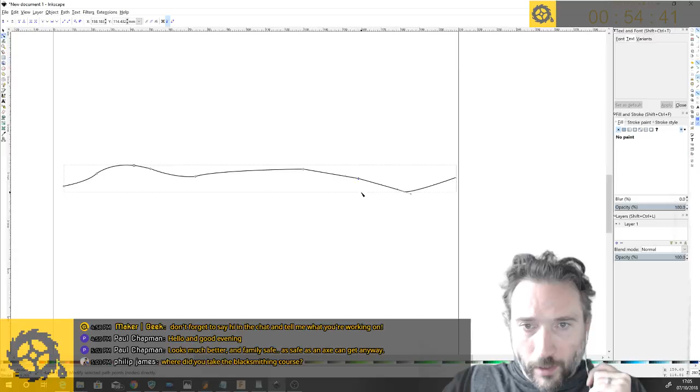Somehow I managed to end up with straight lines and curvy points. I don't really understand Fusion in that regard - not Fusion, Inkscape in that regard.

Okay, so very boring line. Let's create some text. Text. Make...

A geek. I wonder if we'll have room for 'CAD like nobody's watching'.

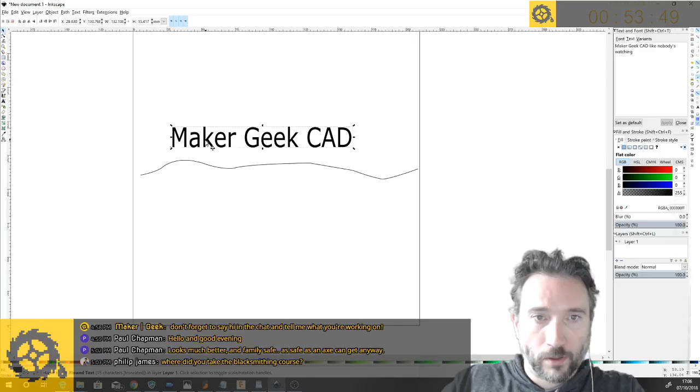Yeah, give me more size. Can I? Oh, why did that disappear off the end of my text? It's all there - if I do that... 'CAD like nobody's'. Okay, that's weird.

Nevertheless, what we're going to do is select the path and select the text, and somewhere there we are - put on path. Marvelous.

Well, I really do want to find out why it's not giving me all of my text. Have I run out of space? Maybe. If I get rid of that for a second... length of text is longer. Yeah, apparently I lose it after a certain amount.

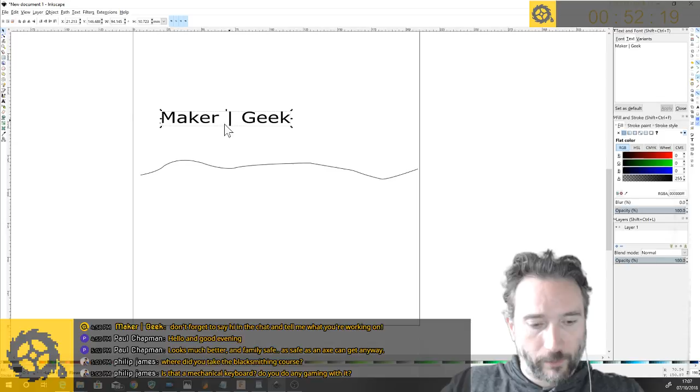That's interesting. This is where I should just ask for somebody that knows better. Okay, well, I'm not that fussed about it at the moment. Let's just do that for now, and we'll put it on the path. Oh no, I need to select them both, I think. Text on path - boom. That's a little bit funky.

That'll do. And save as SVG. Let's do that - text on curve. We'll just put it on the desktop for the moment.

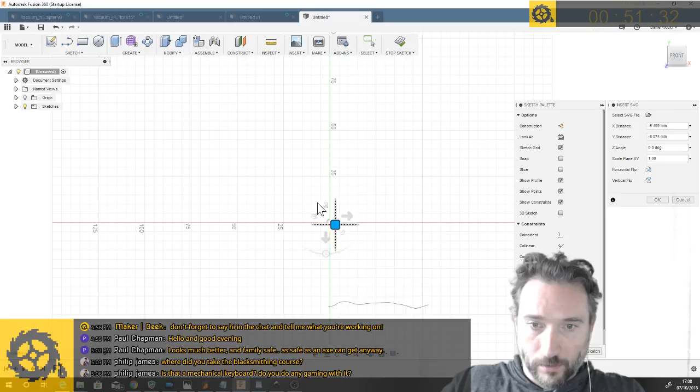So let's have a new design. Insert SVG onto here. Go find our text on curve. Oh, that's interesting - so I have the curve, but I don't have any text.

Well, it is a mechanical keyboard. You can obviously hear it in the speaker. It's not a gaming keyboard. I just really like that when I'm working from here, I can get away with having a really antisocial loud keyboard. It's just really lovely to type on. It really is, it's a joy. I've had it for a while, and compared to sort of mushy, quiet keyboards, just having that tactile click...

Is the business. Okay, why didn't I get my text on the curve when I asked for text on a curve? Did I manage to export the wrong item? Let me see about that. Replace it - possibly, maybe I was just selected on the wrong thing when I did that.

Sadness, they're just giving me curves and no text. Why? This is not the part that I thought I was going to have problems with.

That's peculiar. What if I... Oh, maybe, do I need to convert the text? I need to turn it into a path or something - object to path? I have a funny feeling that might be it, that it can't export it as a font, but needs to think of it as a set of paths.

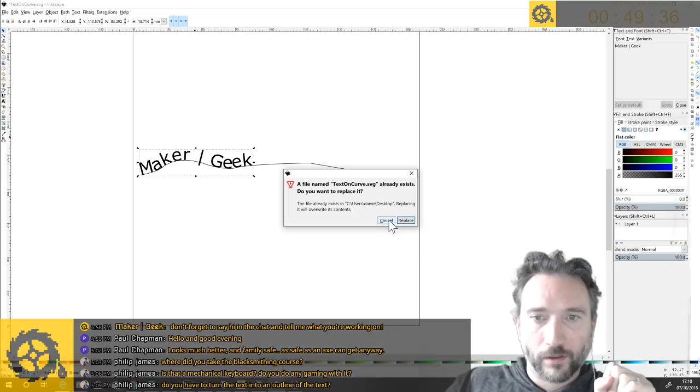Let's try that. That rings a bell actually, that you have to do something with the font. Let's try that again. Hey, there we are, that was it - you need to turn it into paths before you can have it.

Okay, so let's do that. Actually, might get rid of the liney bits, or maybe I'll just accept. Right, so now then, now where it gets a bit more interesting.

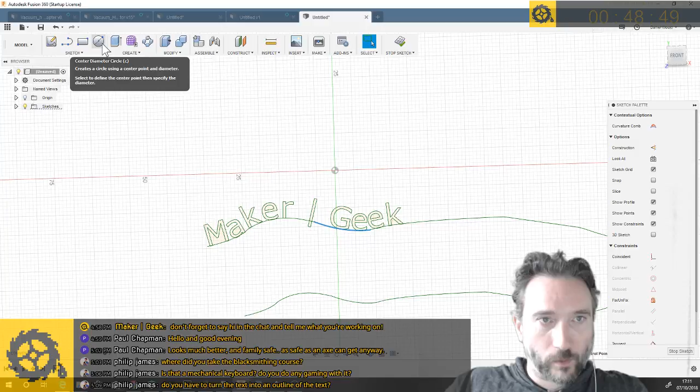I was just watching a YouTube video which explained a method for using the sheet metal environment to get yourself a curved surface. So let's make this 100. The basic idea was create yourself a circle.

Oh yeah, I kind of want those sketches to be unrelated to each other. Let me forget that, go away. I want to create a new sketch please. Stop sketch - you can be one sketch. Create a new sketch on here. Thank you - so create yourself a circle of a certain size.

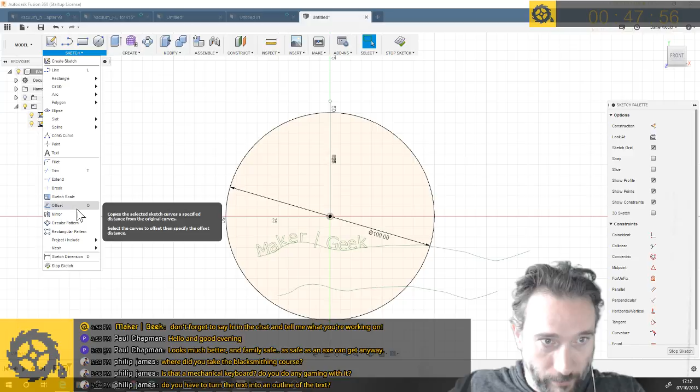Take a little notch out of it, like so, by creating two lines just close to each other. So we'll offset that line, and then turn these into - well, I guess I was going to say turn them into construction lines, but it doesn't really make any difference. I guess I've obviously killed it. Okay, well there you go. So I've ended up with, come on, you as well - construction lines. So you end up with just this sort of slightly incomplete circle.

Now, sheet metal - create a flange, and extrude this up to be, I don't know, let's say 20.

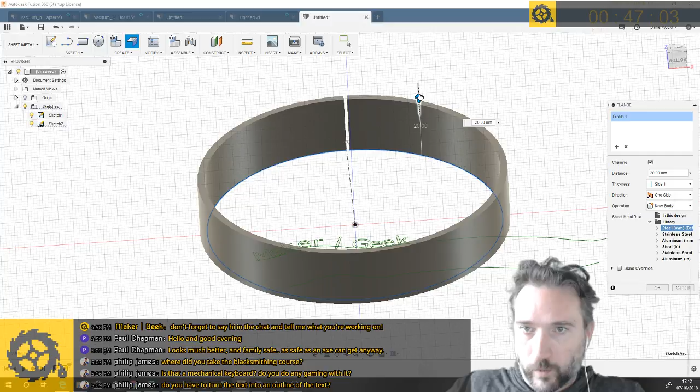So now you have this thing, and apparently to do folds you need at least some section which is flat, which is why you cut this little notch so that you can extrude out a panel, and you end up with, in theory, a little flat bit. He says not being able to select the little flat bit. Let's see if this works anyway.

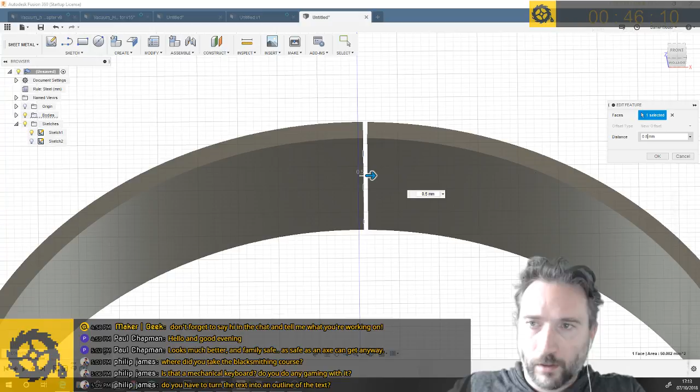Then you can say unfold. No, that didn't work. Why didn't that work? Did I not extrude it properly? Did I? Oh, I did offset faces. What is that? Maybe that's a problem. Should I have done a proper extrude rather than offset face. This is why it's important to go through these things yourself, to be like, what is going on?

Okay, let me go get rid of that. Forget that. I often get into this problem between offset faces and extrude. I actually want it to extrude, whereas I think offset faces was doing too good of a job. Okay, and I don't want to cut, I want to join. Right, yes, there we are.

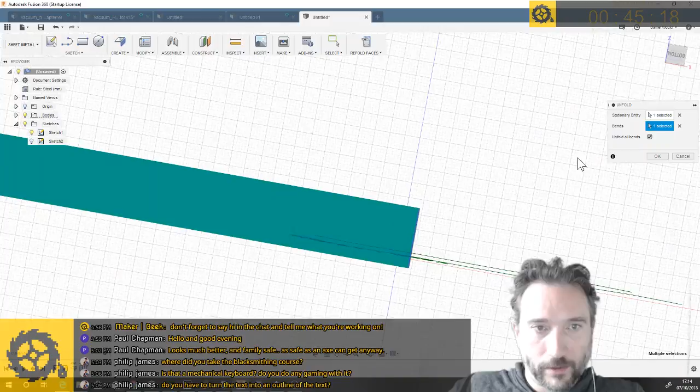So now we have a little flat notch on the end. That's what we're looking for. So now that we can do that, you can say, take this bad boy, select his flat face, and unfold everything. So now you have what was a circle, and you now have a flat section.

Now what I want to do is take this sketch, and I want to redefine his sketch plane. Oh, of course you would like hide everything from me. Okay, I don't want to. Can I not? You know what? I'm just going to import the damn thing again.

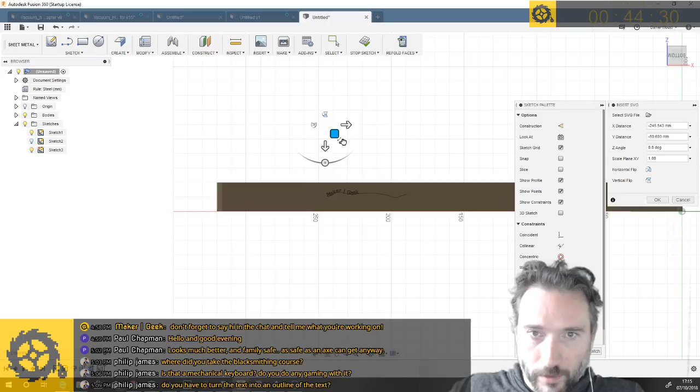I'm sure there is a nice way that I can import onto this surface. And of course you've hidden everything behind there. Let's scale him up. Scale him up a bit more.

That's the other thing I remember about Inkscape, is that you import things and they end up in the relative position that you had for the A4, and so they end up in the middle of somewhere. Anyway, okay, so stick him there.

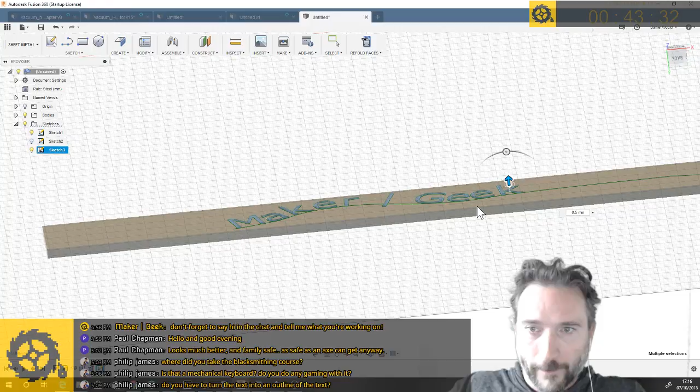Now let's extrude all of our letters and shapes and join them, not cut them. So there we are, a nice raised text on a thing, and then refold faces. And what we should have, oh, it's on the inside. But what we do have is perfect text on a curved surface.

That is pretty cool. Now, that was the example that I found on YouTube, and I really should have made a note of the guy that I watched. If you search for like text on a curved surface, I'm sure you'll find the same video I did.

Now, I'm curious to know how far I can go with that. Like, can I make like a really... I mean, I've never used the sheet metal environment. I assume that you can create folds of all types, flatten them out, put text across them, and then refold them. That's quite an interesting idea.

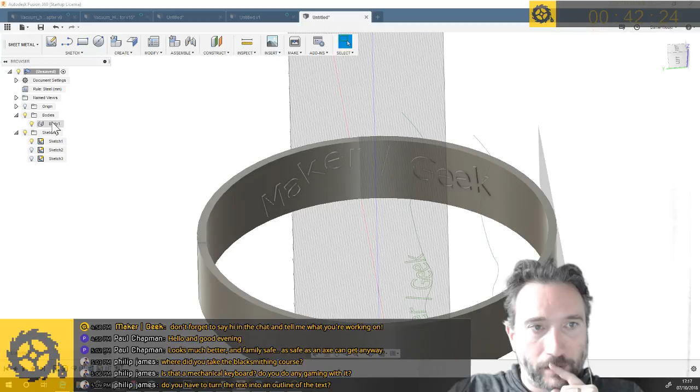So this is now a weird kind of a body. What does that mean? It's a manifold. So if I go back to the model environment, what is it? So it thinks of this as a type of thing. I'm just curious to know whether that can be exported as an STL like that? Yes, it can. So I think that's pretty cool.

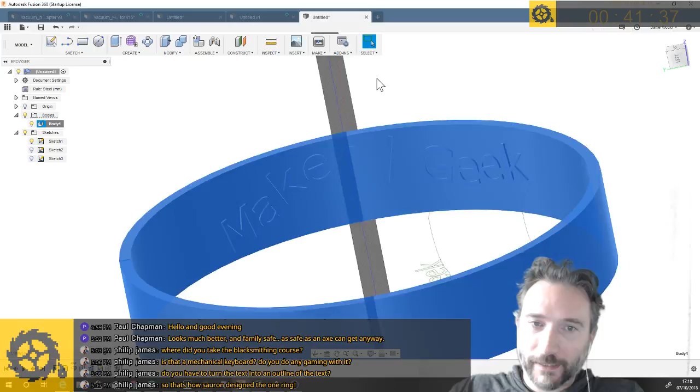I mean, you have to figure out which side to be on to get your path, but you can both have it kind of on an interesting path and also around a surface. Yep, Sauron on Fusion 360, that's exactly how he did it. Put the text on the inside.

I think I want to have a quick go with whether or not I can make a more interesting manifold. So let's get rid of that for a second. Can I make a manifold off of this crazy line that I made? A flange. Why did I say manifold? I think I've got the idea of manifold on my brain.

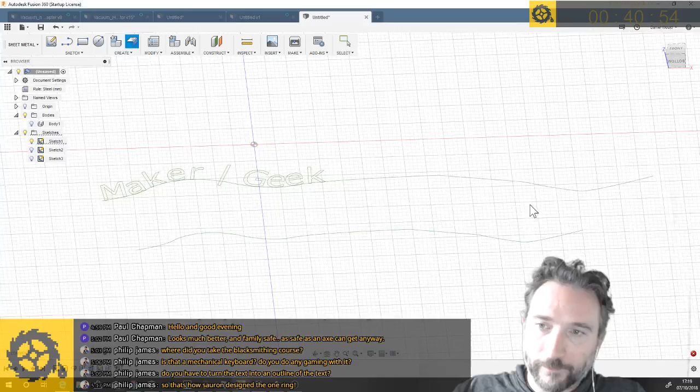Okay, well that didn't work. Error, could not create a valid result. Try adjusting the values, changing inputs. Okay, that's no good. What if I draw?

Yeah, so that's lines. I'm just kind of trying to think how I could get a more interesting shape than just this. Maybe that's time for another day. Time is ticking, I don't want to spend it all on this.

Text on cylinder. Okay, but that's kind of cool. If you get the hang of it you could probably do some cool stuff. I'm wondering if you could do spirals. Yeah, I think I couldn't extrude the line because there's nothing to it.

Although the doing of the circle was off of a single line that had no thickness to it, it gained the thickness automatically as part of making it a flange.

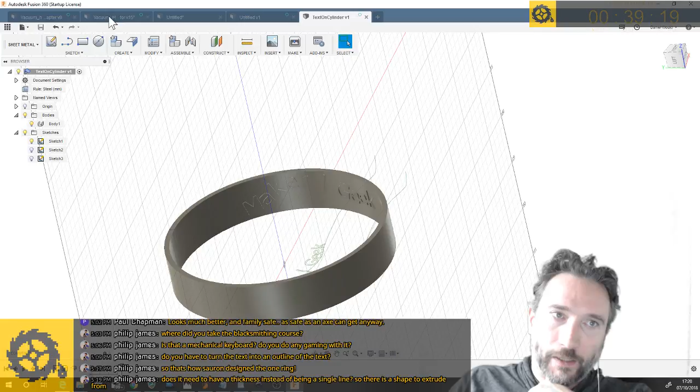Anyway, quick return to this. So I was just quickly gonna try again to get this little reducer mirrored around the place. I've come back to the point in the timeline before I joined it. I did earlier, what did I do? Oh, I have to go back to the end of the timeline.

But I have created a little bit more clearance on the inside and created a little seated part for the bottom of the interior, which I think will help with the print.

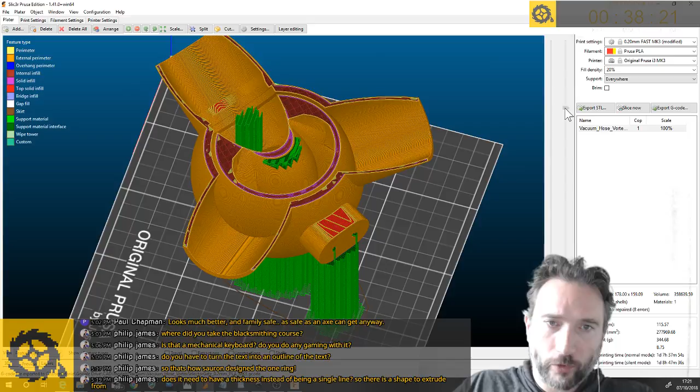And in fact, if I look at this, so this was me slicing earlier. So you can kind of come down through this. See, it does put some supports on the interior spaces, but that's kind of okay.

But what I realized when I did this earlier was that I hadn't quite separated the two components at the bottom. They were going to get welded together, which is not very easy to see in this view. But in this view, you can see here that before it gets split out, I'd kind of messed that up. So,

And I remembered at that point that I also hadn't made the reducer collar all the way around. So quickly then, let's pattern that bad boy. Circular pattern, that's the object. This is the axis, blue axis. Okie dokie, I think that should all be okay.

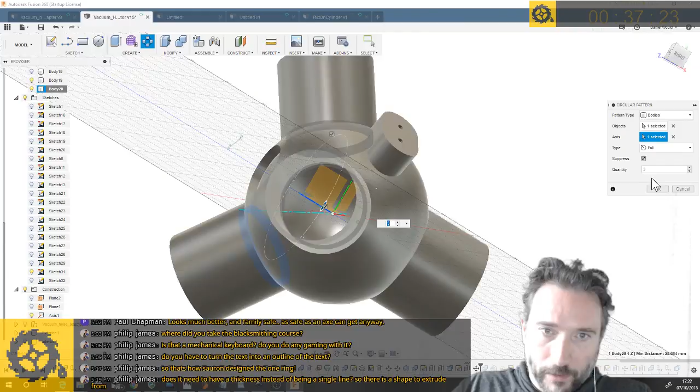Marvelous. So if I return to the end, what I should find is, although I don't have the chamfer on the other two, I do at least have that ready to go, so we can put that chamfer in and join them as well. In fact, let's combine them right now.

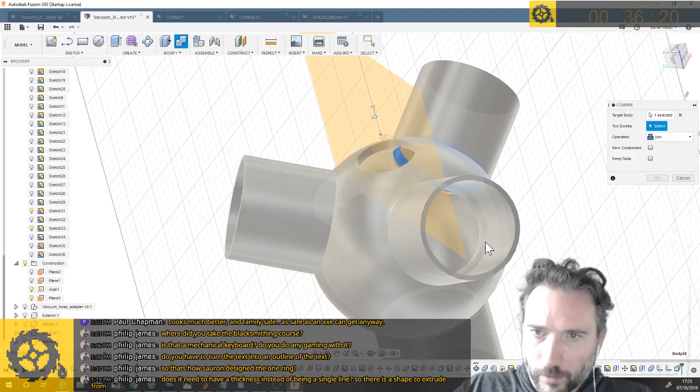You and come on. Turn off the interior piece. I want to select. Did I just go to the wrong one? No. Fine, I'll combine them one at a time. Whatever. And we'll combine this guy, and then we're almost done.

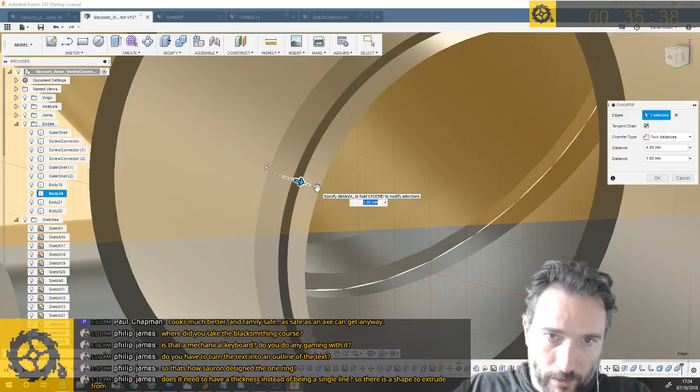It's always tempting with a really long print to just sort of rush to the point that you can hit go on the printer, but I try to be good and remind myself that it's better to have dotted the I's and crossed the T's than to set off a print that then wastes a whole load of time.

Okay, and blend it back. I can't remember how well I did it on each of the sides, but that's whatever. Construction planes are in my way. Cute, no, not that. There we are.

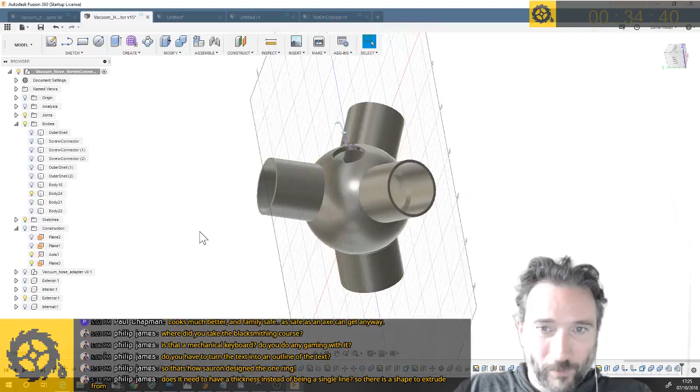So let's get in here. Right, that might actually be finished, which is a miracle after the amount of time I've spent faffing with it.

So everything's got a little bit of a reducer to help the airflow. We've got our bracket. There's now more like a mill clearance on the interior. This surface here is the bottom of the internal piece, which hopefully gives us something to give a support against, which I can also rip out easily enough.

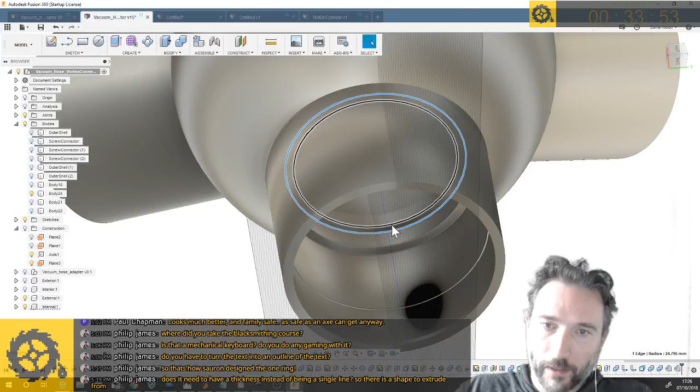And I was thinking that once printed, I might even be able to stick a rubber O-ring in this gap between here and here, which would give it something to sit on, which would hold it in alignment and would also give it that little air brake. Oh, well, you know what I mean - stop air from going around the outsides.

I think that that's done, I think it's done. It's good. The only thing I need to figure out is, when I come here - when I combined what was a component body with another body, it started to make it not part of my component anymore. Come on. Oh, fine, just create a component for it.

So I realized at some point that you can only export multiple STL files - I think this is true.

Or multiple disconnected bodies in a single STL file if they're components. You can't do it from the normal list, which is kind of odd, but whatever. The first time I had that problem, I ended up actually connecting two things together with a tiny little cylinder, just so that I could hold them in their relative positions.

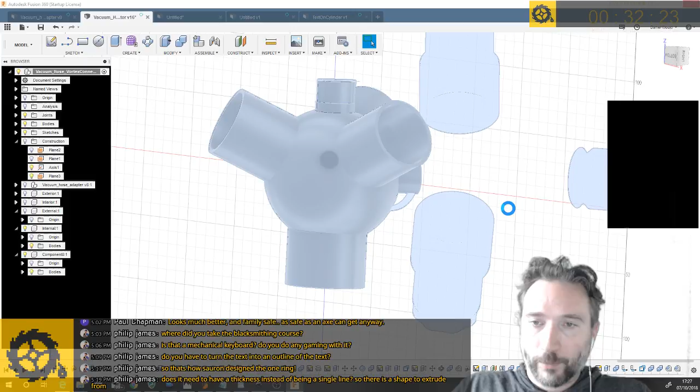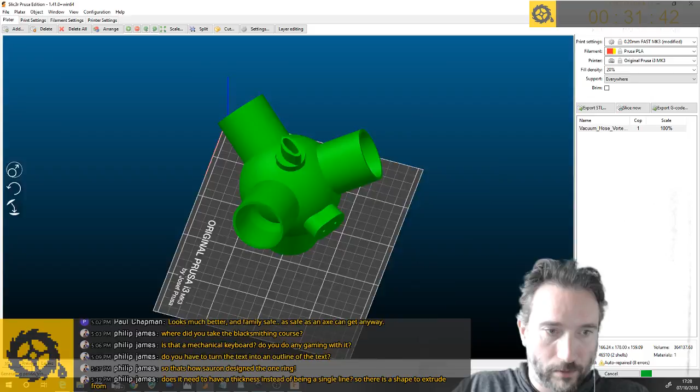But then I found out you could do it through components. So let's just export this, and that will be that for the moment. Where are we? Vacuum hose vortex connector. That's the business. So now if I come here, we'll just quickly drop that object out of the slicer, reload it, keep all the same settings, and go slice. Hopefully that will be that when it loads. So yeah, that's going all right.

I still need to think about this whole kitchen knife design. Such thoughts.

It's taking its time, it's a bit of a complicated model. It's definitely going to take more than 24 hours to print, so I also need to think about when to print it, because as much as I don't mind the printer running overnight when I'm here, I'm not as comfortable leaving it running when I go out to work. As safe as they are, I feel like that's just asking for trouble.

Hurrah. Okay, so what we need to see is whether or not we have successfully left these components separate at the right point, and that is really hard to see. Let's go to layers. That does not look right. Although, or is that just... is this support material? It might be that it just ends up on the same support material.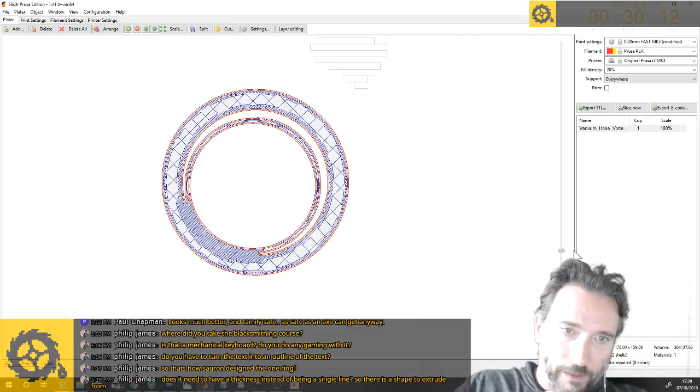Tricky. That definitely looks like it ends up connected. I do not want it to end up connected, that would be really irritating. Okay, I'm not going to continue worrying about that for now. I've spent way too much time fiddling around with this idea. I'll fix it at some point this week. We'll get it printed next week. I'm going to try and have the physical thing to show people. That would be ideal.

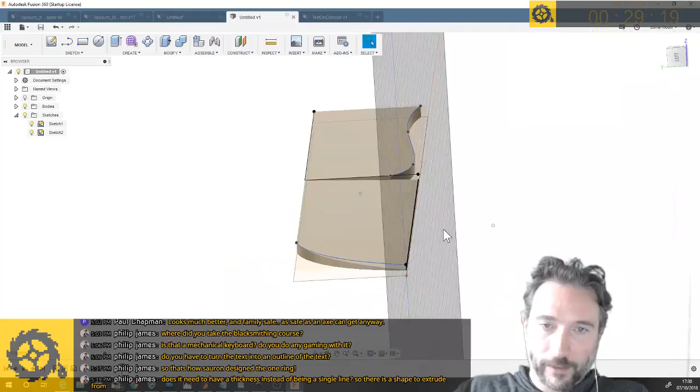Right, so back to knife ideas. Specifically, I think what I was thinking about was how I want to create a filing jig to go with this. I was thinking about this earlier, like I've got, I didn't bring it up, so I have these hand files. I had this idea of creating a set of clips that would clip the file in, that would run on little runners. This doesn't make any sense, but basically try to hold it in exactly the right plane.

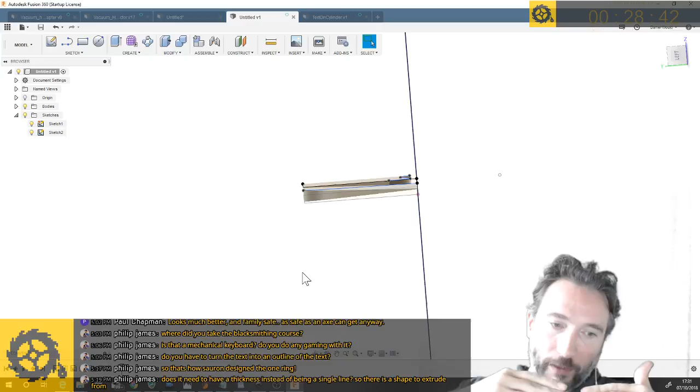So you have a 3D printed base that you put the metal of your knife into, that would initially just hold it so that the right amount of waste material is held above the plastic line, and then a jig such that you can only move the file in that plane and within the confines of the blade. That was a really terrible description. Maybe it will come clear if I get that far.

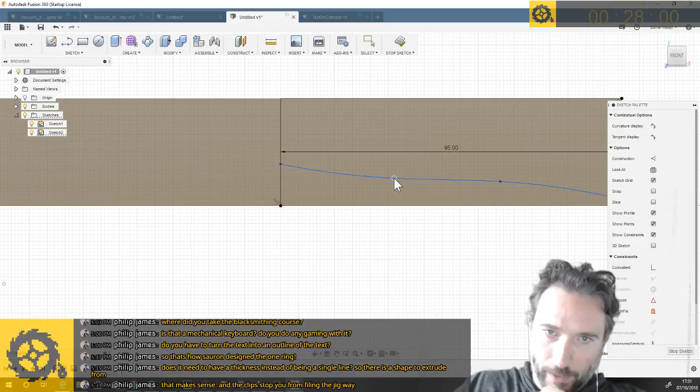But I feel like that's where the potential comes from, is this idea of I'm just going to adjust this whole kind of rubbish handle idea. Yeah, just the potential to build essentially a jig which is exactly for the thing you're making, if that makes sense.

What is a good handle shape? Maybe that. I feel like with a chopping knife you definitely need that clearance. What is that clearance? Come on, 13 mil. How big is my finger?

Yes, Philip, exactly, the jig will stop me filing the jig away and will hold it within the right confines. So let's see, if I'm chopping, got a grip, gonna measure my finger. It's quite wide, 19 mil if I'm clenched around something.

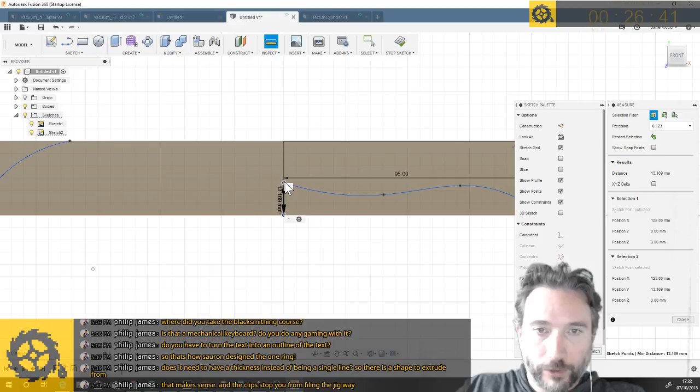But I don't want to take too much meat away from this, so hang on, this whole thing is 30 wide. So I guess if I can afford to make this, stop measuring, I can afford to make this like half, to give myself a little bit of finger room.

Can I insert a point? Insert a spline fit point. That's what I want to do. And yeah.

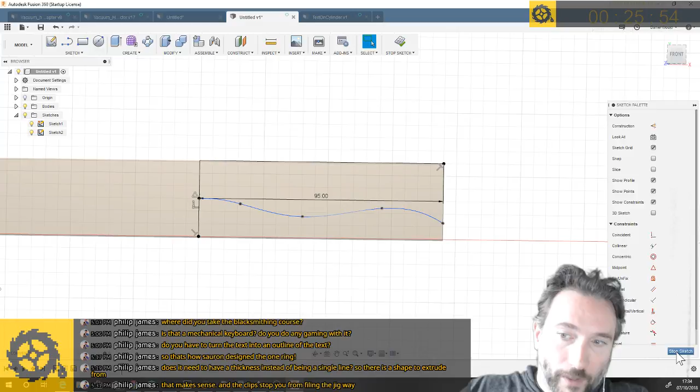Okay, let's assume that that's better. Up that, come on. Oh, did I disconnect the point somehow? Why can't I connect? That's weird. Somewhere I've managed to lose the notion that that is actually, excuse me, a joined sketch.

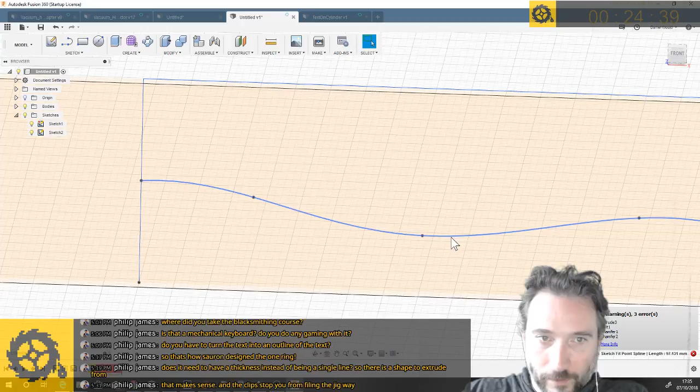I love how parametric this whole thing is, and the fact that you can come back and modify stuff. But it has to be said that I do seem to spend quite a lot of time when I go back and edit things, break everything, and then spend ages trying to figure out what I broke. Why is it not working? Why would that curve no longer do the thing it's supposed to do? It's killing me, it's killing me.

So sometimes when that happens, you find out if you zoom in that the points aren't really on the lines, but they are. Did I break it when I added a new point? But that shouldn't have done anything.

Another day in Dan is flabbergasted by why Fusion does slightly peculiar things.

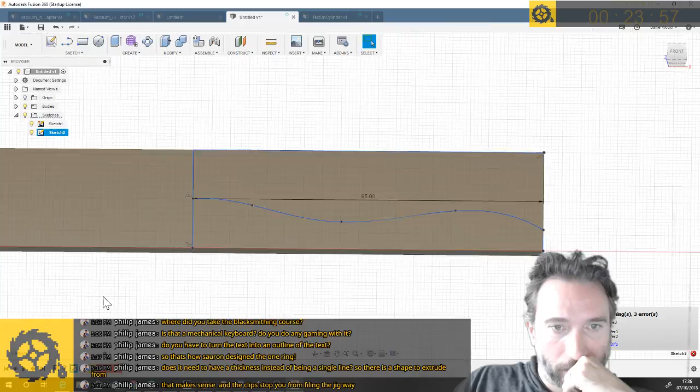Did I manage to connect it to the wrong thing? Let me delete some of these constraints. Go away, constraints, I don't like you. Don't understand what is going on. I can't do anything now. Fusion is not happy with me.

So that's definitely... Can I not get rid of that? I think I caused myself problems when I first moved that point and it snapped to the end of this constraint line, because I don't think that's a real thing. Was it a constraint line? It wasn't a constraint line. It's just a distance marker.

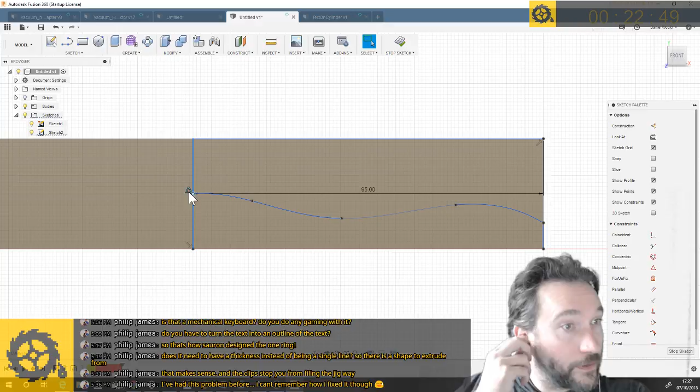Yeah, I feel like I've had this problem a number of times where I spend a while being like, what, is it on the wrong sketch plane? Is it connected to the wrong thing? I can't see the fact that I can't modify this point anymore makes me think that I've caused grief beyond grief. So I'm just going to Control Z my way back to the point just before I did that. See, at this point, it knows that this is an enclosed shape.

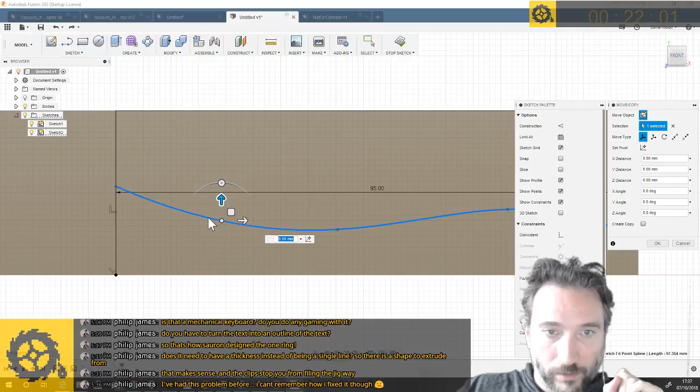So that's my theory, is that somehow I managed to... So if I put it up there, and let's... what did I want to do? I wanted to insert a... like... I can't even remember how I did that.

Oh, right, yeah, let's just say okay to the move copy. That's good, we've still got shapes. That's excellent. Insert a spline fit point on there. Okay. Right, there we are, so just going to curve that around like that.

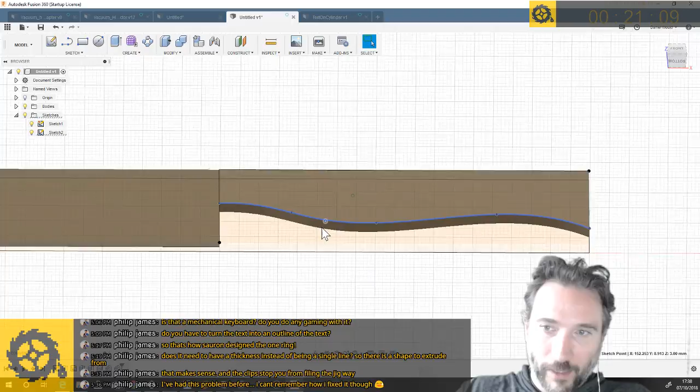That is so weird. Okay, now we're happy. So why on earth would it let me snap it to a constraint line if that then renders it somehow not connected to the sketch plane? Fusion, you've got some splaining to do.

So something else I did do yesterday after playing with this a little bit was I went and looked at my kitchen knives and realized that they don't typically taper all the way back. They have like a little hilt line, I guess, like a little wedge line that's not down to the blade. So I think I want to put that in, and I should probably put it in before I do those two things.

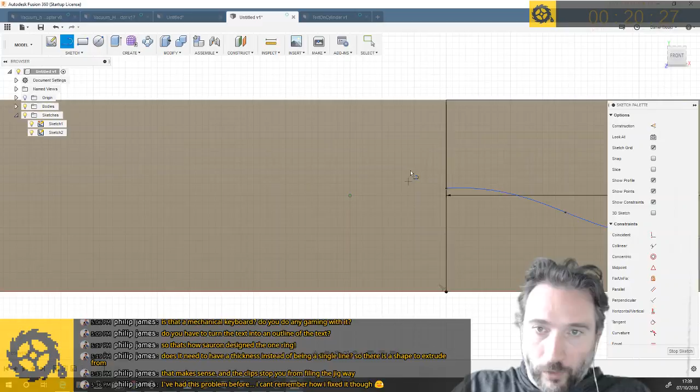So let's sketch onto here. I'm going to make it like that. And how did I do? Oh, because yeah, so I split this whole body into two separate things. So maybe I'll do the same with this. Split that body. And then we'll roll forwards.

Except, oh, yeah, because I just want that edge, thank you. And, oh, oh, that's interesting. Ah, right, yeah, because I need to fix this up, yes, sorry. It just takes a little bit of time sometimes for the brain to catch up with what's going on.

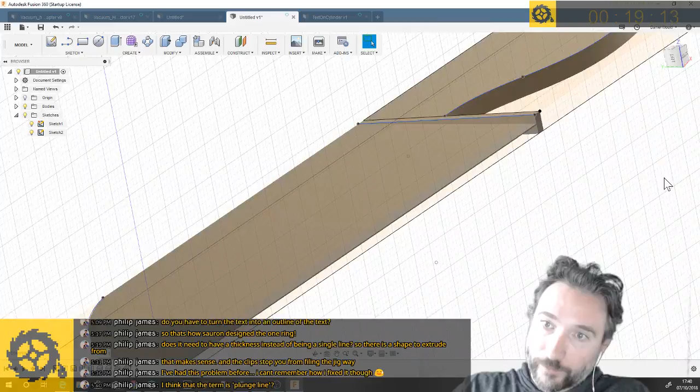There we are. So then we have this, which would be probably rounded, I guess. Chamfered. Come on. I just want to chamfer this fella here and this fella here. I'll fillet it rather than chamfer it. Like that. So the plunge line, is that what it's called? But yeah, I guess it prevents your finger running into the super narrow edge.

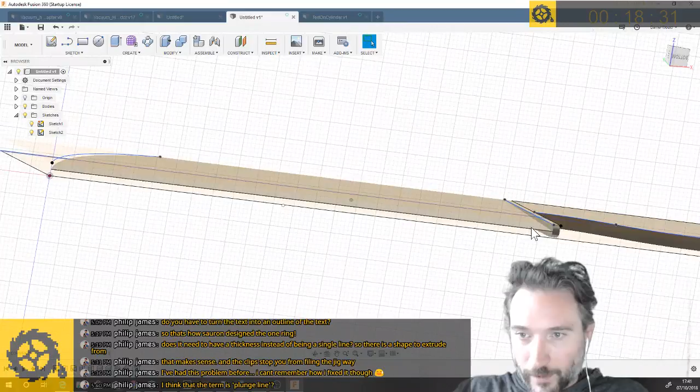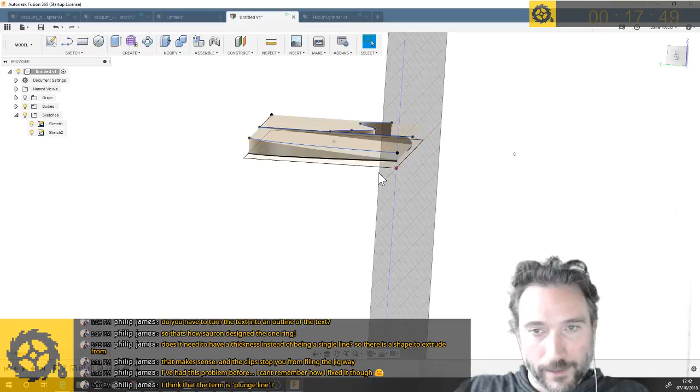So still not completely stoked about this curved line. Now again, my actual knives don't have a flat blade line. There's probably a reason for that. Probably. What I'm worrying about though is that mentally I think this makes sense to me as a shape to file and get a consistent edge on. But if I bring up the point, like if this is a curved line, then does that presumably make it much more complicated to get that super consistent flat bevel.

For the moment, I'm going to try the thing I was thinking about doing yesterday, which is defining a plane at a tangent to that face to create some cylinders that would scallop out little shallow dishes from that, which I think is what I want to do.

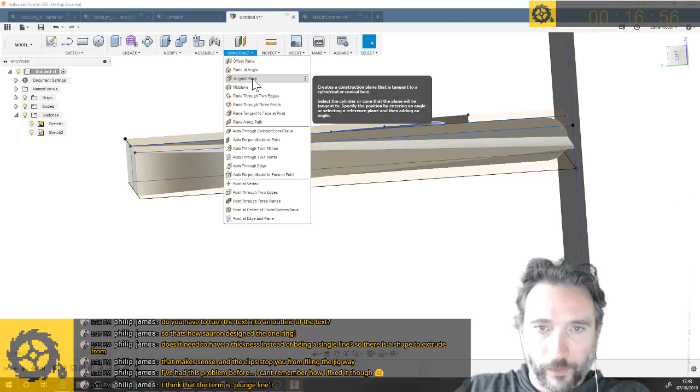Is it a tangent plane, or is it just a plane at an angle? Can I do plane at an angle and select that face? That's super annoying. Sometimes my brain obviously doesn't work right, because I think the most obvious thing I'd want is to give a reference plane which is a face on my thing, and just define a plane at an angle to that. But that's not what it does.

Plane along a path, plane at offset, plane... no.

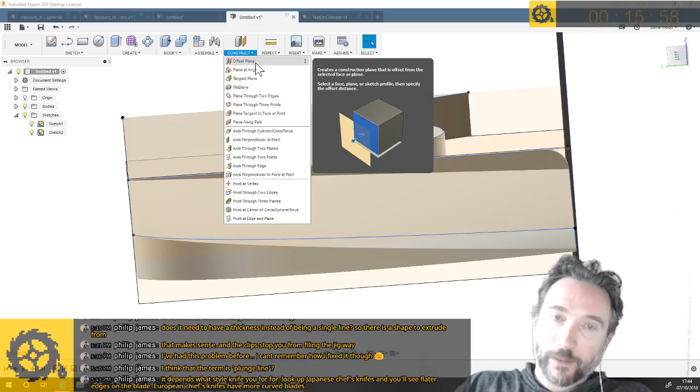Japanese chef's knives have flatter edges on the blade, Europeans have more curved blades. Interesting, I did not realize that was a regional difference. I'm sure I've seen knives that essentially have a straight edge, whatever you'd call that. I'm sort of toying between what I think I can make well and what will look good.

Plane through 3 points, plane through 2 edges. Point through... I don't want that. Oh, I want... could I do that? No. Plane through 2 edges, so I can select that edge, and that gives me the plane. Okay, that's a start. So that's the plane that the knife blade geometry is on.

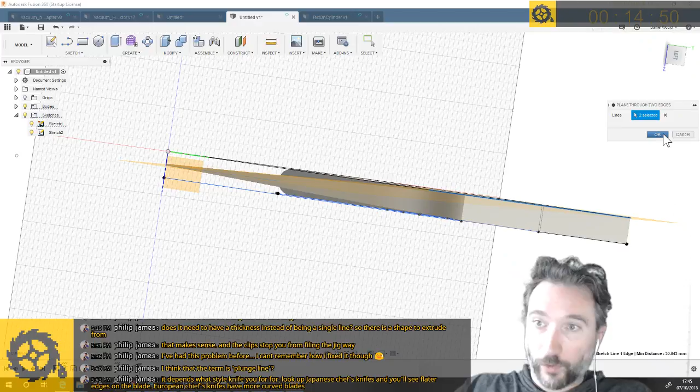Okay, now plane at an angle. Can I do plane at an angle? No, can't do plane at an angle to another plane. Why? Can I not just say, give me the plane that is 90 degrees to that plane? That's not helpful either.

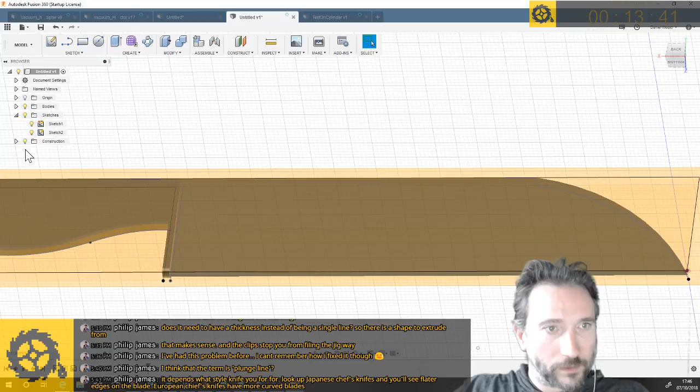So, can I do what I want with this plane in this orientation? Probably I can. I just need to think a little bit about it.

Let's sketch a slot on the new plane. So let's do that, and say 5. Oh, that's a good point. I could probably do that. It seems out of the way though, doesn't it, Philip?

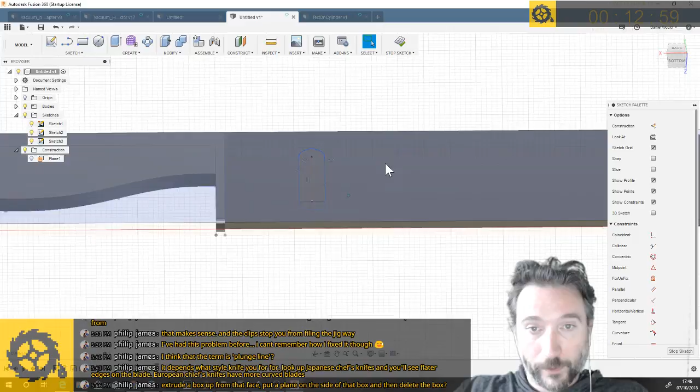Like, I mean, I think you're probably right. That would do it. It just seems odd to me that there wouldn't be a better way to do it than to have to create an object as an intermediary. Okay, well, I have that geometry.

And I kind of... oh, well, I wonder if I can do this. If I revolve this profile... no. Oh, can I...

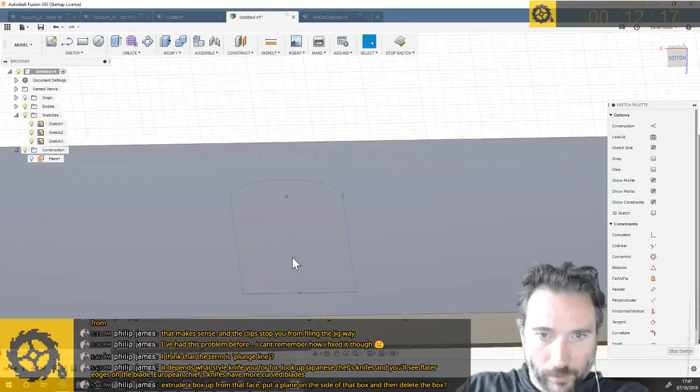Where did the bottom of my... see how I've got this and this, but I don't apparently have the bottom one. Oh, there it is, maybe it just took a while to render. So I was thinking, if I could revolve that around its own center axis, that would give me...

But it does not want to let me do that. I don't really understand why it wouldn't let me select it. Can I extrude it?

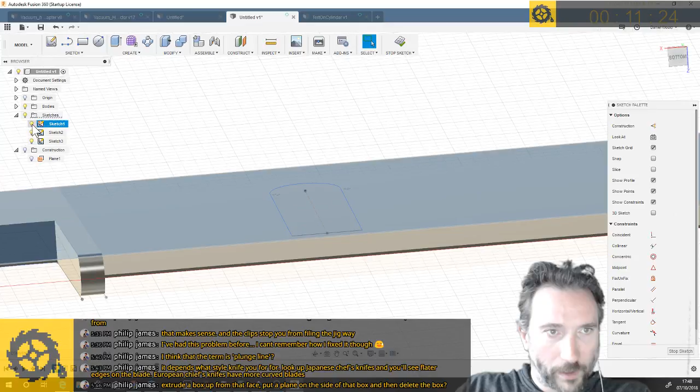You are also a very confusing thing. What am I... let me get rid of... okay. So I think that's the right sketch plane, but it does seem like this line likes to appear and disappear at will, which is confusing me.

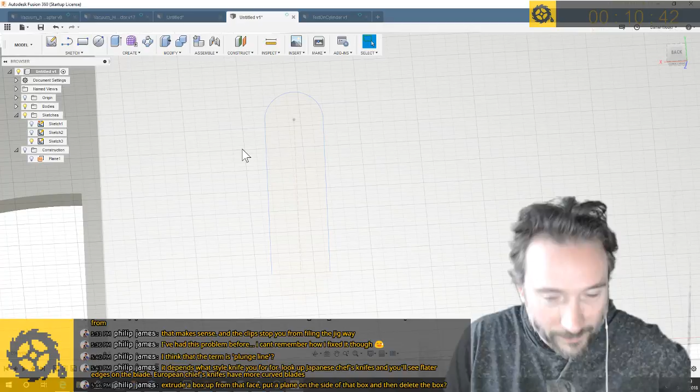It disappears when I try and connect. What is that? Okay, so right now... why? This is very frustrating, that this is the second thing in as many minutes that, for odd, sketchy reasons, it doesn't consider itself to be an enclosed profile, even though I literally created it as one piece.

What if I put an arc on this thing? This is the sketch I want to edit. Why? I mean, no, that's a whole new sketch. I don't want a new sketch. I want this sketch. Edit this sketch.

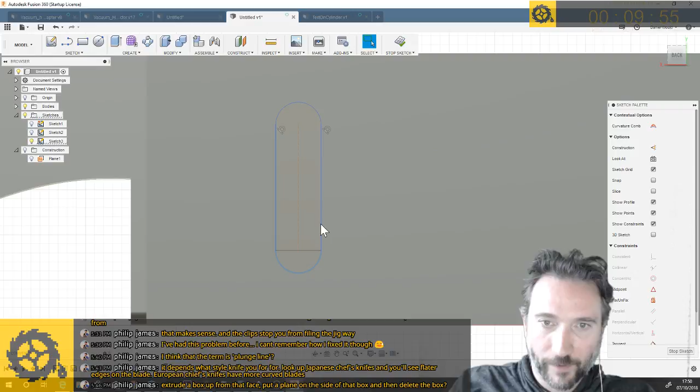Yes, give me an arc from here to here. If anyone can see what I'm doing obviously wrong, please do point it out, because for some reason I don't really get it, even though I'm literally inside this sketch profile, it does not want to let me do what I think of as a very obvious thing.

Why does this not think of itself as an enclosed profile that can be extruded or manipulated? What has happened to my... before I go entirely crazy, I'm just going to try...

Okay, we'll put a circle. The circle is a fixed thing. That is a profile, okay, that worked. Get rid of the circle, get rid of the pill. I'm just going to come back to the point that that thing doesn't exist anymore.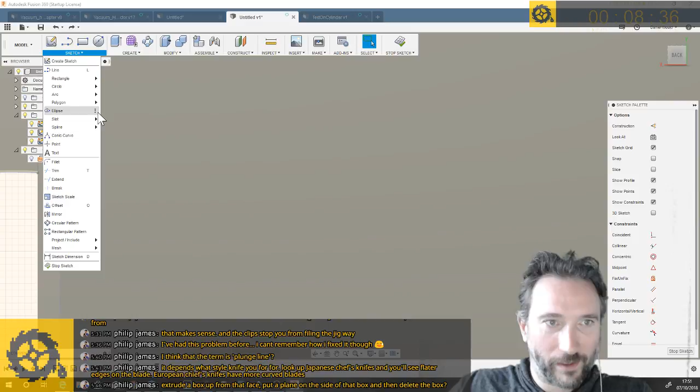Right, okay, we're in here, we're creating a slot. Center point slot, you're a sketch. We'll make it, let's say, 15 long and 5 wide.

What has happened to the bottom? What? It's obviously been a long weekend. Right, plan B, I'm going to say 15.

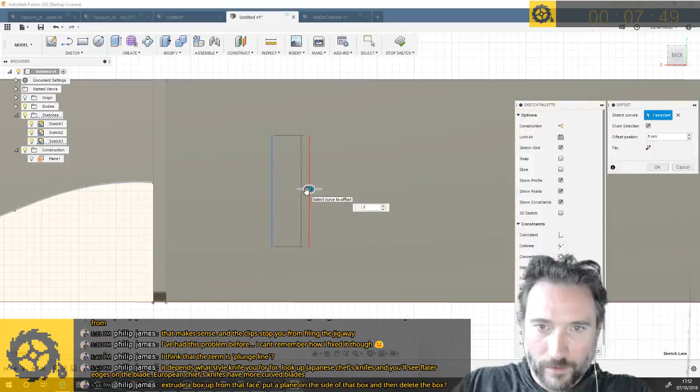And then I'm going to offset that line by 5. Then I'm going to draw 2 arcs, 3-point arc, boom, boom, boom, and repeat that, boom, boom, boom. It's done the same thing.

But this is just a sketch plane, there should be nothing special about this. Why the... can I join them in a straight line? That works, that's okay, that creates a profile. No, that doesn't create a profile.

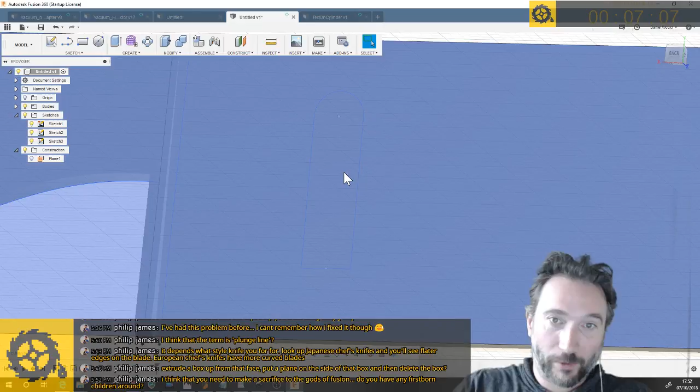Maybe I need to get on that whole firstborn child thing, so I have something to offer up.

I feel like I don't understand. Is a sketch on a plane? I've never had this issue with sketches not doing what I would expect in that regard. Why?

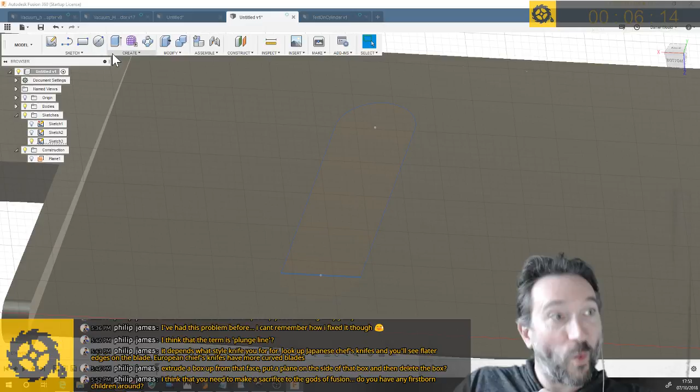Well, it's 6 minutes to gin o'clock. I feel like I'm going to need one before 6 minutes. At least it's Doctor Who tonight.

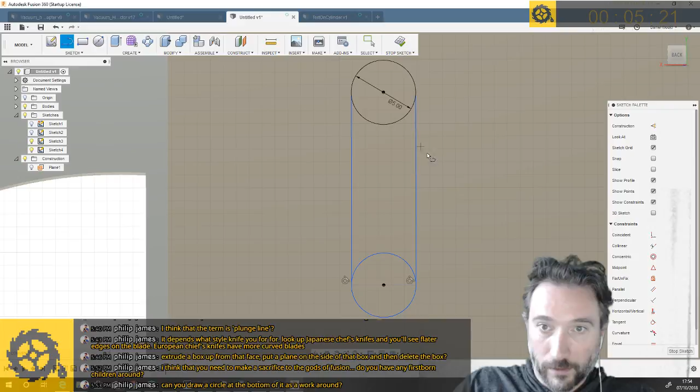Circle at the bottom, let's see about that. If I do that, that's a profile. The rest of it doesn't think it's a profile. Let's try doing a circle at the top as well. So those two things are profiles. You've connected. You've connected. Now you're a profile.

So what I want to do, let's try this. Axis through 2 points, you and you. I'm going to do a revolve of this through this axis. And that definitely doesn't work. It was an interesting theory.

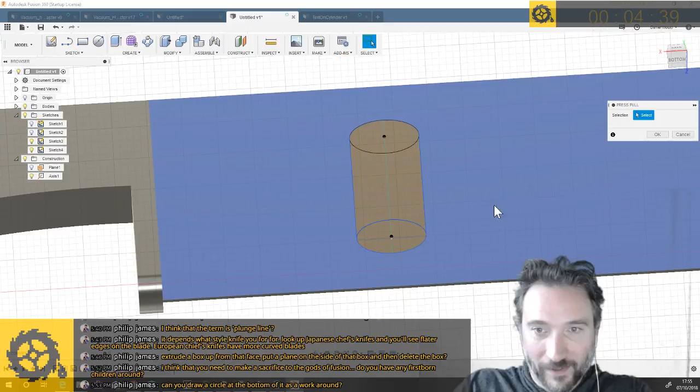Okay, but so that I can do these operations on... why the hell did that not work with a slot? I don't understand how that could be the case.

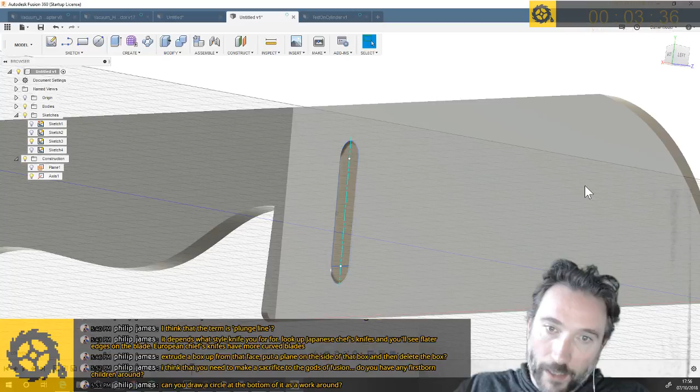That's the sort of thing you get on blades, right? Like these little recesses. I don't know how I would form that, but like an array of those down the length on both sides as the little reliefs. Little relief.

Okay, I'm very confused as to why a slot didn't work. Is a slot a different kind of geometry? It seems like it should just be the same. It seems like it should be the same. Maybe someone who knows more about Fusion than me could explain that one.

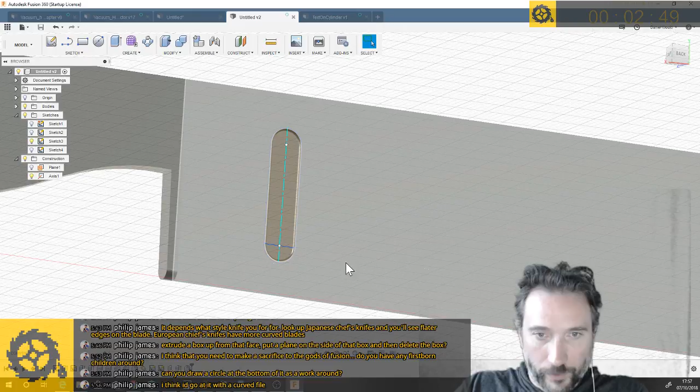Right, what I do want to do is create this all the way down. Now, what I can probably not do is select it as a... maybe I can. Let's...

Rectangular pattern for you and you and you and you. Come on. Like that. Directions, that direction. Let's have 6. Like that.

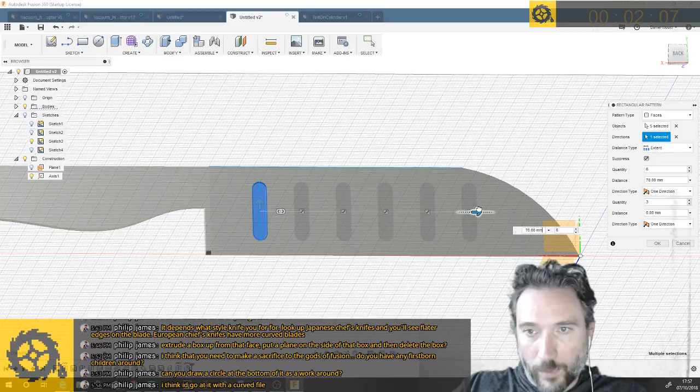See, now that worked perfectly, spectacularly. Like exactly the way I would have hoped it would have done. No muss, no fuss. I briefly thought it might give me grief about the fact that I hadn't really done the same kind of extrude and whatnot, but no problem.

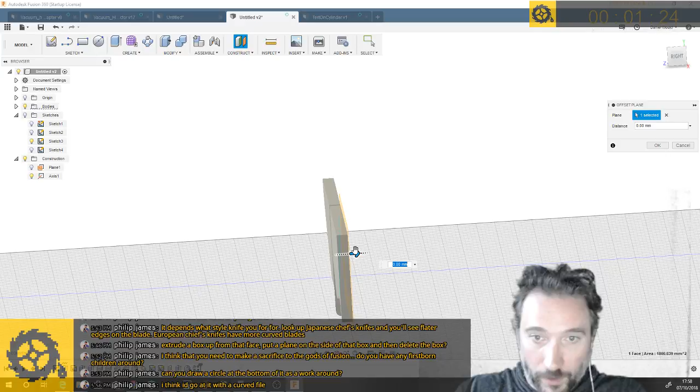And I reckon if I try, I can probably mirror them. In fact, although I need a construction line that's down the middle of this. Offset plane, offset from here, minus 1.5 because it's 3 mil thick.

So create mirror, I want to mirror faces. All of these. And we'll mirror them onto the other side of the blade. I have literally no idea, like this is probably not the shape even that you get on real knives. Maybe I should do more research there.

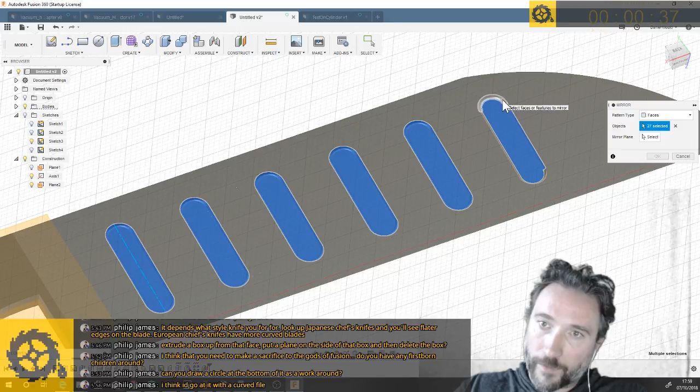How would you machine this profile? What would you do? Boom.

Oh, now that did not quite work. Back to my favorite, compute failed. I don't like it. Okay, well that's interesting, that it could mirror - I could do it along this line, but it couldn't mirror to the other side.